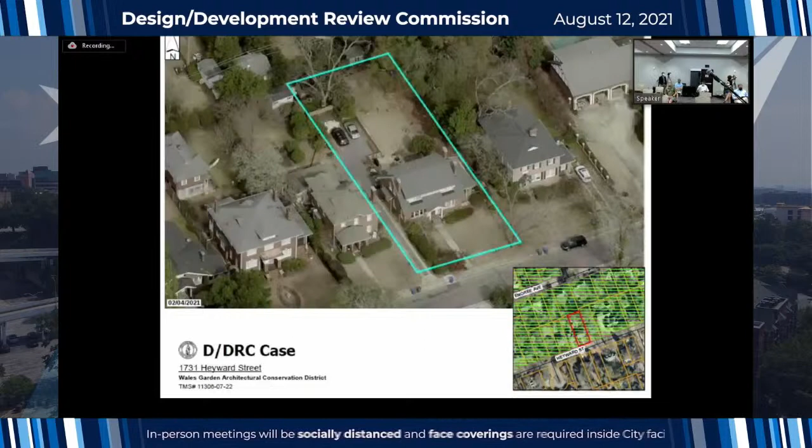Will staff please read the consent agenda? Certainly. The first item on the consent agenda is 1731 Heyward Street, a request for design approval for an addition in the Wales Garden Architectural Conservation District.

The next case is 3101 Amherst Avenue, a request for design approval for exterior changes and an addition, as well as for preliminary certification for the Bailey Bill. This is in the Oakwood Court Architectural Conservation District.

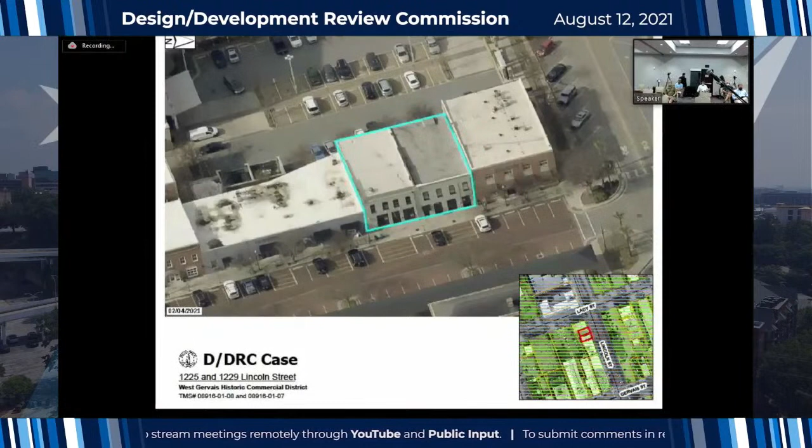The final case on the consent agenda is 1225 to 1229 Lincoln Street. It's a request for design approval for exterior changes and for preliminary certification for the Bailey Bill. This is in the West Gervais Historic Commercial District.

Is there anyone from the DDRC that would like any item removed from the consent agenda? Is there anyone from the public, either here today in person or participating virtually, that would like to have an item removed from the consent agenda?

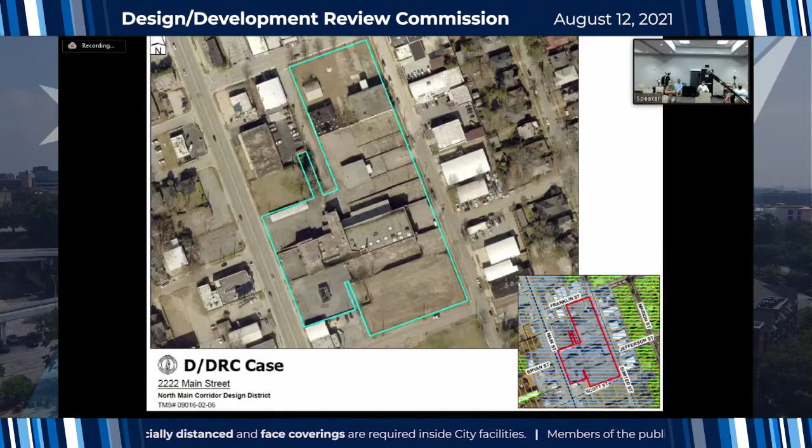Sure, so the first case on the regular agenda is 2222 Main Street. This is a request for certificate of design approval for new construction in the North Main Corridor overlay. This proposal is for a mixed-use development on the site of the former Jim Moore Cadillac dealership between Main and Sumter Streets and between Franklin and Scott Streets. The development proposes 248 residential units and a few live-work units, utilizing primarily structured parking with some surface parking.

The project was before the commission for an informational presentation in May. The commission generally commended the site plan, with a few suggestions about addressing the visibility of the parking garage from North Main Street. Architecturally, the commission recommended a simplified materials palette with a more commercial appearance along the primary corridors, emphasizing the importance of the percentage of fenestration as well as the depth of openings to provide articulation to the facades. Staff comments reference the design guidelines for the North Main Corridor Design District within your packets.

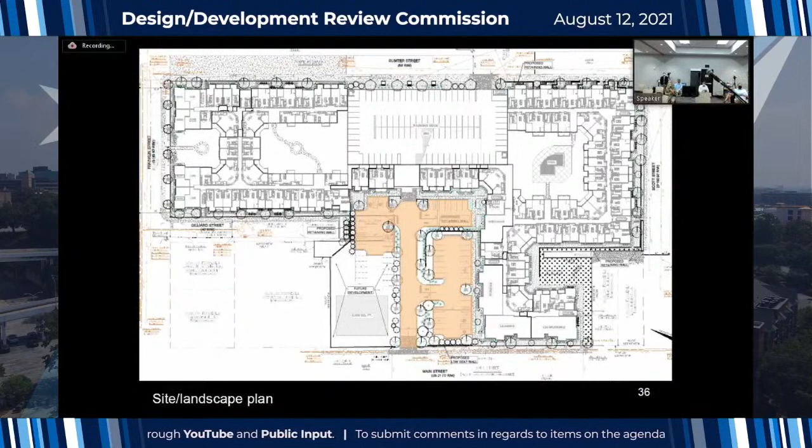The building is primarily sited appropriately, addressing the street frontages with narrow setbacks and placing surface parking to the interior of the parcel and/or screened from the right-of-way. The one exception, which is a change from the informational presentation, is the garage frontage on Sumter Street.

Previously, there were residential units along the Sumter Street side of the parking garage, providing active frontage along the sidewalk. Due to some grade challenges, the units have been moved to the west rear side of the garage, leaving the garage frontage exposed along the sidewalk. While landscaping is proposed to soften and screen the facade, it is far less effective than addressing the public realm with residential units, particularly on this neighborhood-facing frontage.

The building provides straightforward commercial space with large storefront windows that would easily accommodate various uses over time. The applicant has responded to the comments at the May meeting effectively by providing additional brick on the facades, increasing their percentage of openings, and scaling back some of the more stylized details to respond to the simpler context of the North Main corridor.

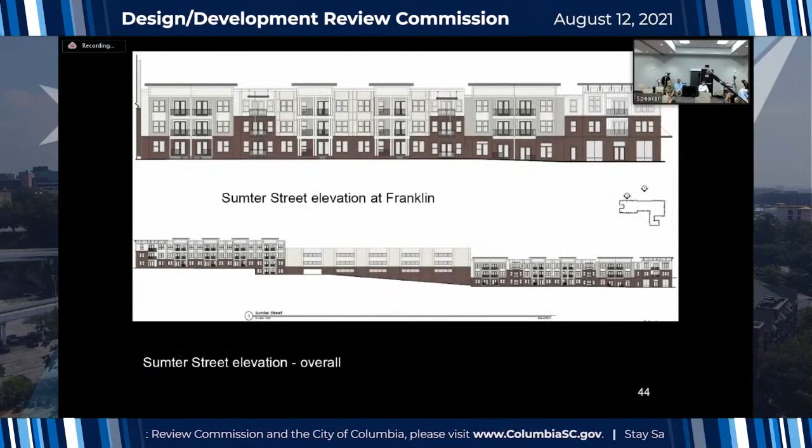While the Sumter and Franklin intersection had previously shown a restaurant space, this has been modified to live workspace for logistical reasons. The live workspace provides storefront opportunities that will provide a nice transition from commercial to residential along this part of Sumter Street. The residential frontages along the street have stoops and direct access to the sidewalk as recommended. The brick is brought up to the second floor to emphasize the corners of the buildings. The Scott Street elevation will need to be reviewed.

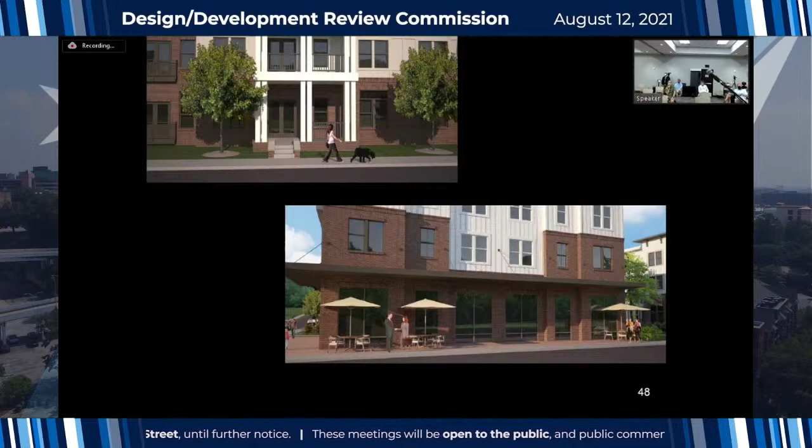The staff recommendation is for deferral of the request, primarily to address the Sumter Street garage frontage. Staff also recommends addressing the following prior to approval: that the brick be expanded on the Main Street facade bays as recommended in the staff markup, a complete elevation for Scott Street be provided, fenestration calculations for street-facing elevations be provided, window details and sections, material details and cut sheets be provided, roof-mounted utility equipment screening be provided if applicable, more information about Main Street entrances be provided, and retaining wall sections be provided to better understand how the grade change will affect the pedestrian realm.

The applicant is present and actually brought some diagrams or an additional rendering. That's the conclusion of the staff presentation. Thank you.

Good afternoon. If you could please state your name. Yes, my name is Stephen Middleton. Do you swear to tell the truth in these proceedings? I do.

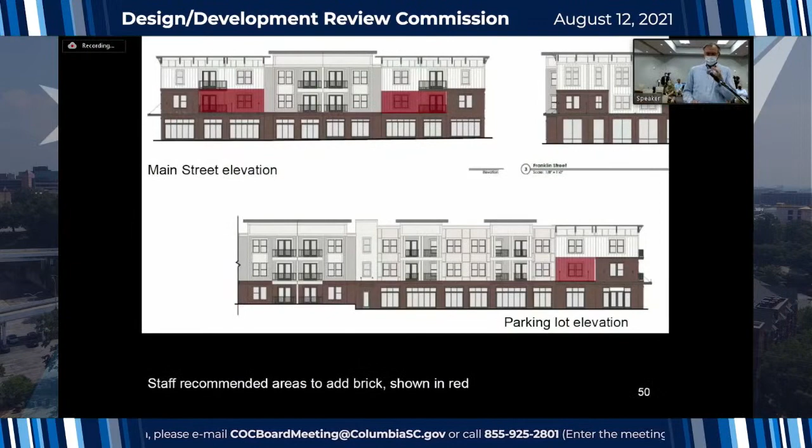I'm Steve Middleton, president of Commonwealth Properties. Commonwealth Properties is the developer of this project. We're no strangers to the Columbia area. We're located in Richmond, but we've developed 4 other projects in Columbia. In the city of Columbia, we developed Vista Commons about 20 years ago, which we still own, down on Gervais Street. It still gets some of the highest rents in that part of town. We recently spent about $3.5 million renovating the interiors, and we're working on the clubhouse. I'd encourage any of you to go by and take a look at it in about a month once the clubhouse is finished, if you're interested.

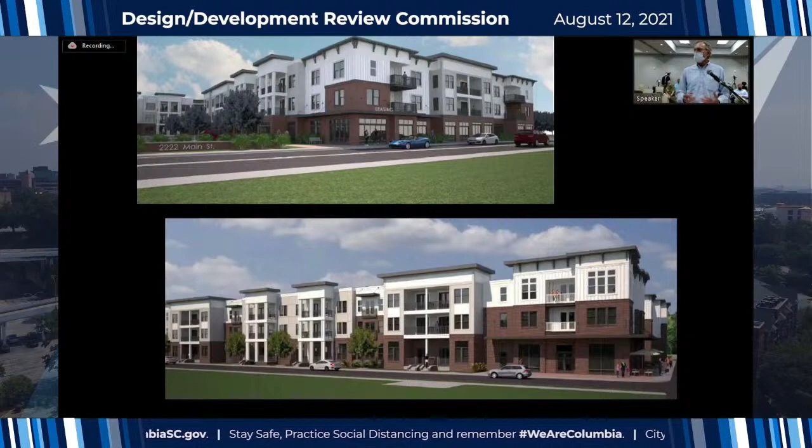We are a development company and also an acquisition company, but we primarily develop luxury multifamily projects throughout the southeast, so that's what we specialize in. This project, as Lucinda said, is 250 luxury apartment units. I'll reiterate, as I said earlier during the informational presentation, that this is not a student housing project. We specifically designed our leasing criteria, both here and at Vista Commons, to exclude undergraduate students. We would embrace any graduate students that want to come, but our typical demographic mix for residents ranges anywhere from recent graduates to graduate students if we're near a university, young professionals, older professionals, divorced folks, empty nesters, retirees. So it's really the whole gamut of folks who are, I guess, now known as renters by choice.

We would expect this project to be one of the nicest, if not the nicest, in the Columbia area, and get rents, I hope, knock on wood, that would reflect that. We started work on the project about a year ago and spent the first several months just trying to understand what the development hurdles might be. And they are numerous on this site, which is something we've embraced.

We spent quite a bit of time working through a variety of site plans and different building designs until we came up with what we would call a preliminary vision concept. We then set out to meet with the folks at Cottontown, Elmwood Park, and the Downtown Coalition. We sent those plans out to them, had Zoom meetings or in-person meetings, either with the neighborhood, whoever was interested in tuning in, or the neighborhood representatives. I think those meetings went generally well. I will note gladly the lack of protest signs behind me. We then took that information and gave an informal presentation to y'all, I think it was a couple months ago, distilled all the feedback we got, and attempted to refine our design to address those questions and comments.

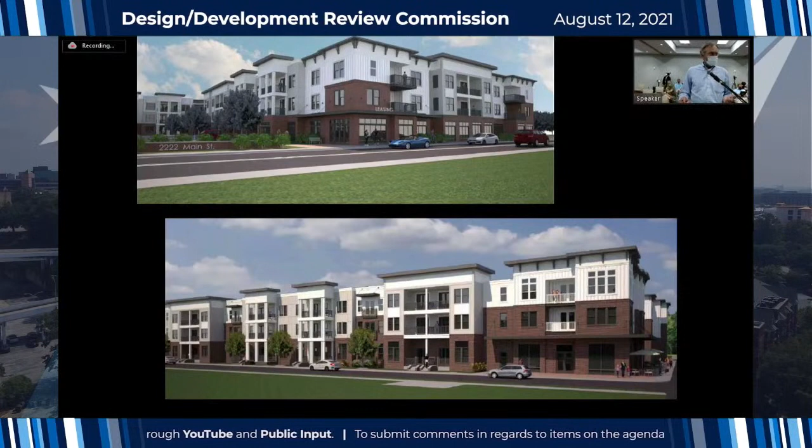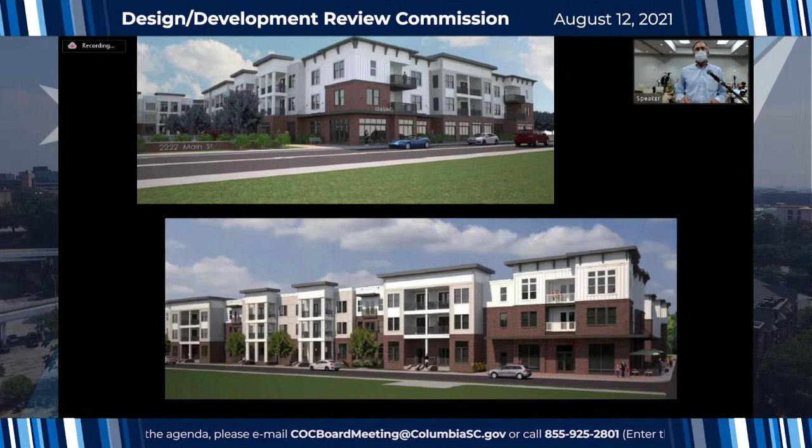At that point in time, I think it came down to 3 main issues: one was traffic, one was parking, and the third was just the architectural style of the buildings. So the architectural style has changed. It's still kind of in keeping with the craftsman style of the surrounding historic neighborhoods, to the extent that this 4-story building can be. We've increased the fenestration, storefront look on the corners there, particularly at Franklin and Sumter, to give it more of a commercial feel. And in fact, those units along Franklin are what we call live-work units.

So they can serve either a commercial function or a residential function or a combination of the two, where someone might have a real estate office up front and live in the back. So they're sort of a residential commercial flex space, if you will.

We also commissioned a traffic and parking study. We got that back probably a month ago, gave it to South Carolina DOT and to the city traffic engineer. From a parking standpoint, it showed that our parking, which meets the current zoning guidelines and exceeds the new zoning ordinance guidelines, exceeds what we need according to the Urban Land Institute and the parking study by about 20%. Based upon our experience, it's more than adequate for what we believe the parking needs to be of our residents. Last thing we want to do is build apartments where people can't park their vehicle, because they will not be long-term residents.

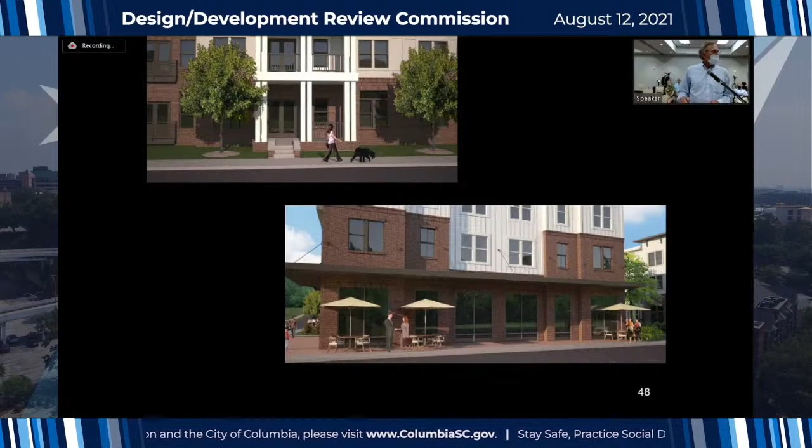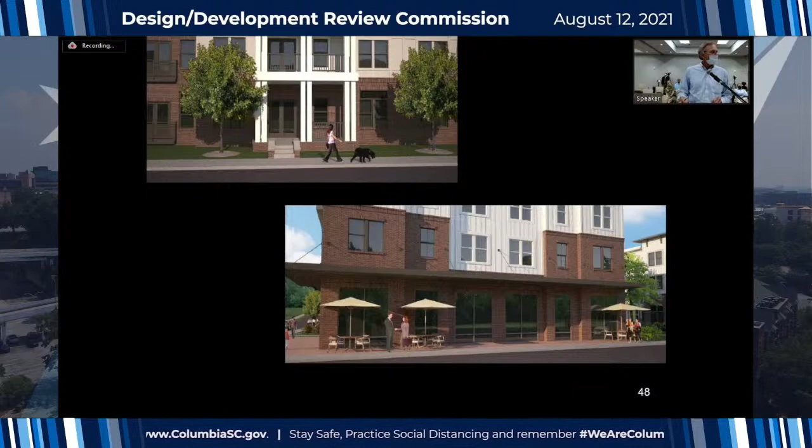From a traffic standpoint, we got comments back from the DOT who objected to our 2 entrances onto Main Street. So we had to change that to 1 entrance, which wiped out a little bit of parking, caused us to redesign some of the parking up front, and also requested that we repave and restripe the 2 northbound lanes of Main Street from Elmwood to River in order to get access to Main Street. So we're still talking to DOT about that requirement, but I suspect they'll win.

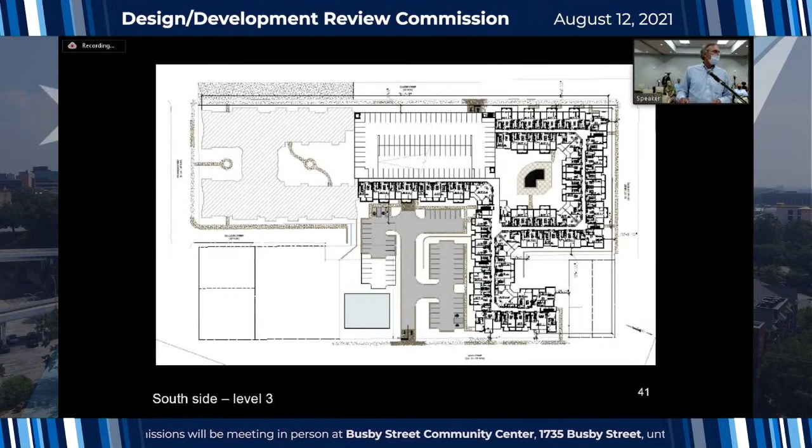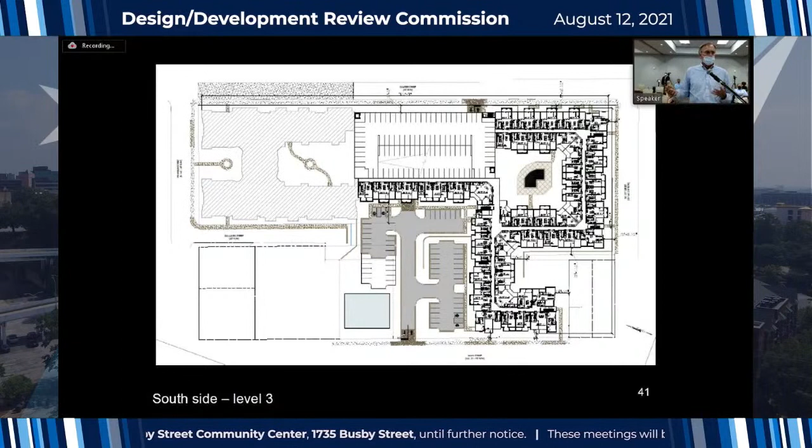So then, I think our current efforts really addressed most of the feedback that we got from the neighborhood and what little we got back from y'all from our informational presentation, which is understandable, and some of the concerns that we got back from the city during our meetings with them. I'd be happy to walk through the staff recommendations and address those.

We had a little bit of a misunderstanding on my part relative to what was necessary to make a complete submission, so we were a little tardy in getting all of this information in. But with respect to brick being expanded on the Main Street facade, we have now, as of today, done that and submitted it to the staff. That's not an issue for us to do. I think we have now provided a complete elevation for Scott Street, and it is similar to the other elevations.

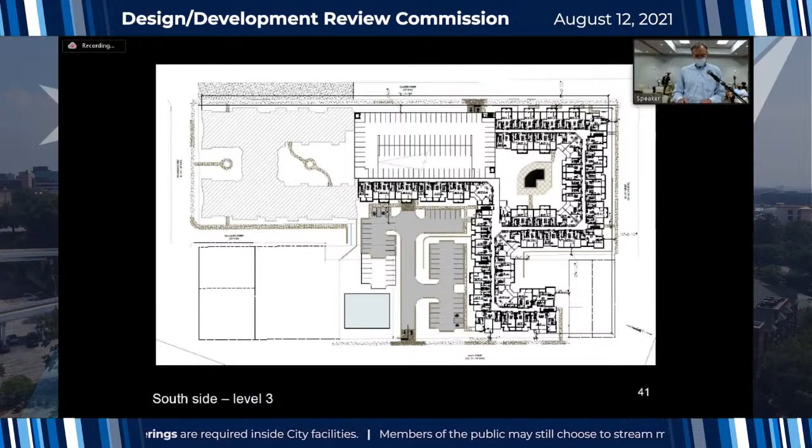Fenestration calculations for the street-facing elevations, I believe, are being done if they have not already been done, as have window details and sections. Roof-mounted utility equipment - all of our HVAC units will be located on the roof. They're located in the middle of the building and will be invisible from street level, hidden either by parapets or just by virtue of their location in the middle of the buildings. We typically locate those over top of the corridor that runs down the middle of the building so that the top floor unit doesn't have HVAC units buzzing away over top of them.

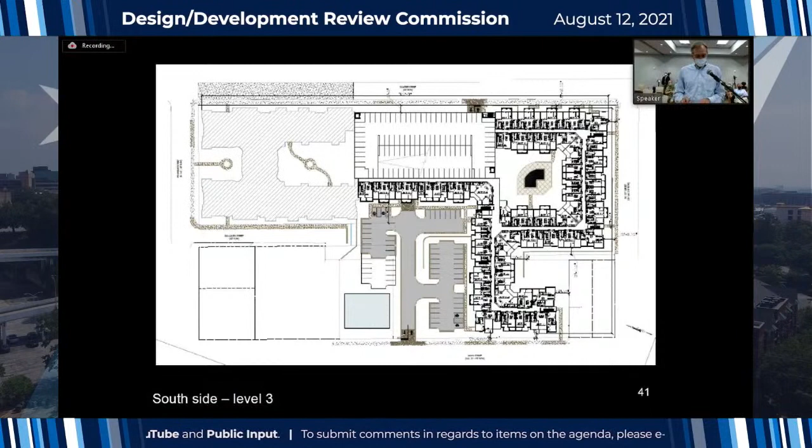More information about Main Street entrances - I think what staff is referring to there is entrances into the leasing office and the co-working space, the bike shop, and the pet spa along Main Street. We would provide a main entrance into the leasing office right at the corner of the building there next to the surface parking, and then we would have 2 or 3 other entrances along Main Street from the sidewalk into those spaces, although they are not commercial spaces generally open to the public. So most of the use of those spaces would be from folks who live there in the project.

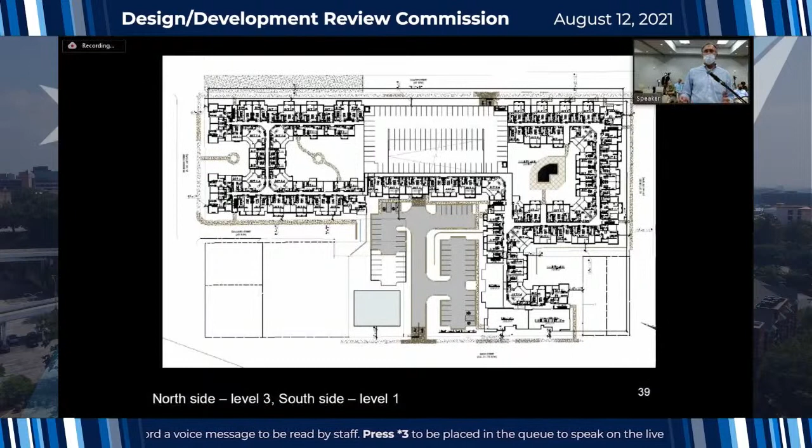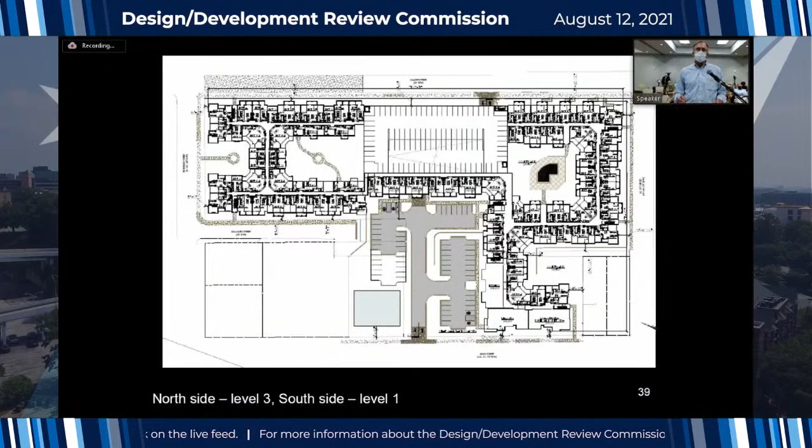I will say too, I'll back up a little bit - I skipped over some of the amenity package in my rush to describe it. So along Main Street there we have a leasing office and a co-working space. We've started including a co-working space into our amenity package where folks from the project, it's like a gather or a WeWork space, can come into this sort of communal area. They can meet with folks from the outside as a conference room, a coffee bar, that sort of thing. There is about a 3,000 square foot fitness center that we spend about $120,000 on fitness equipment on, so it's quite well decked out.

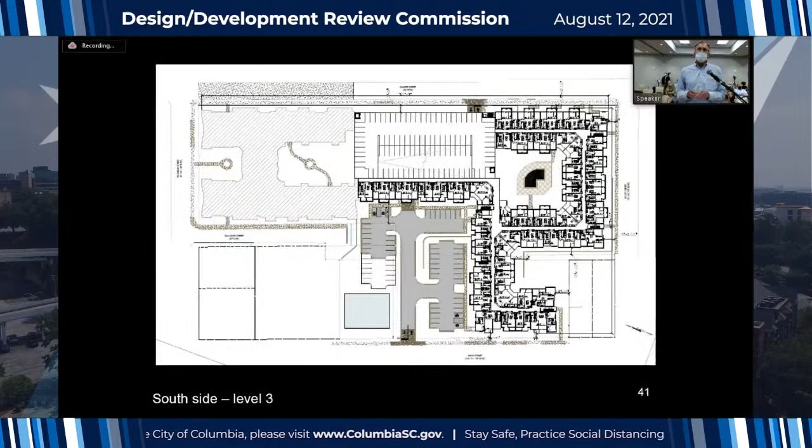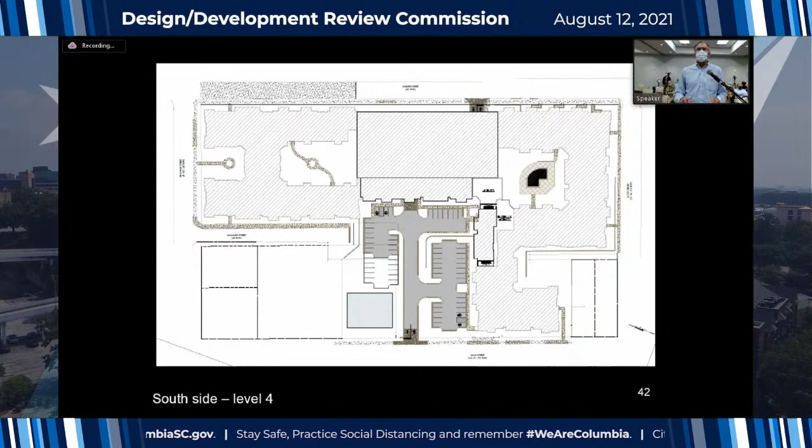We have a pet spa for people who want to groom their pets. We have a bike shop, a bike repair shop area that has bike storage as well as an area to repair bicycles. Then up on the top floor we have a rooftop club room that's about 1,500 square feet with a similarly sized rooftop deck that would look over top the pool courtyard as well as have views of the downtown central business district. The courtyard on the right side of the screen is the pool courtyard.

We call it the active courtyard. It has a swimming pool, which also features a heated swim-in place spa area. We have an outdoor kitchen area there. We have cabanas, an in-water lounge area, lounge chairs, sun deck, hammocks.

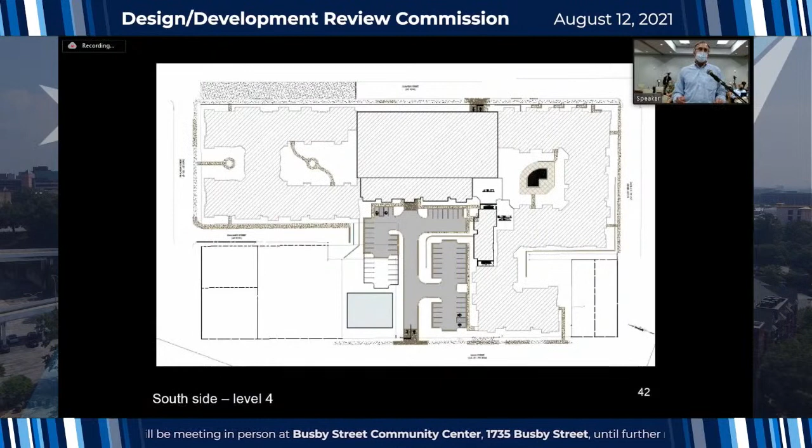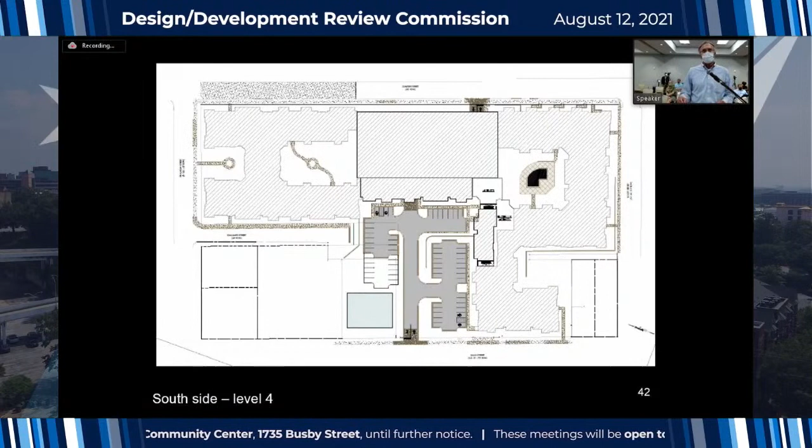And then on the left-hand side is what we call the chill courtyard, which would feature an outdoor yoga exercise area, maybe a putting green, bocce ball, cornhole, some grills, generally a little more relaxed and quieter area there for our residents.

The one area that I think we have difficulty accommodating staff's requests is probably the one that they're most concerned about, is the location of the parking garage there along Sumter. And you can see in this site plan, the big rectangular box in the middle, which is the parking deck, and going towards Main Street, towards the bottom of the screen, are units that line the parking deck.

Those used to be on the top side, lining Sumter. There's about a 16-foot grade change from one end of that parking deck to the other. There's about a 30-foot grade change from the southwest corner at Scott and Main Street to the northeast corner at Sumter and Franklin. So there's quite a bit of topo there to deal with, and we're forced, because of the street grades there, to deal with that 16 feet as it sits on Sumter.

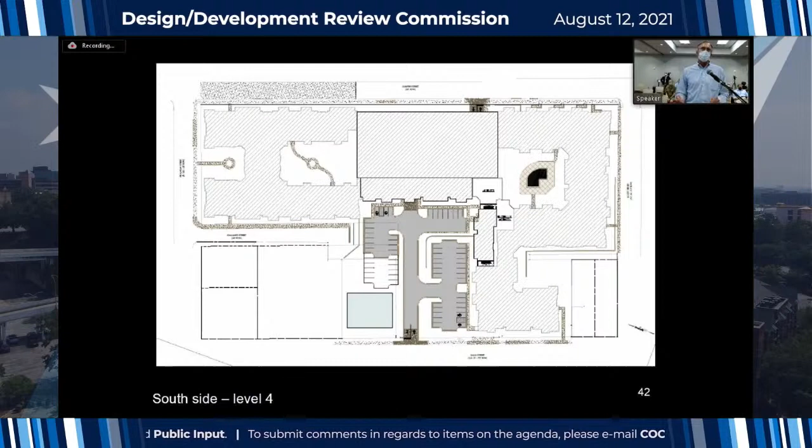We can internally manipulate the grades, but along the street there we're unable to. So to the extent we have units that face Sumter, they also have to meet handicap accessibility requirements, and that grade exceeds what we can do internally in the building to meet the handicap accessibility. So that's the primary reason, not the only, but the primary reason why we flopped those units over to the south side of the garage, the bottom side of the garage, where we can actually deal with the grades there on site.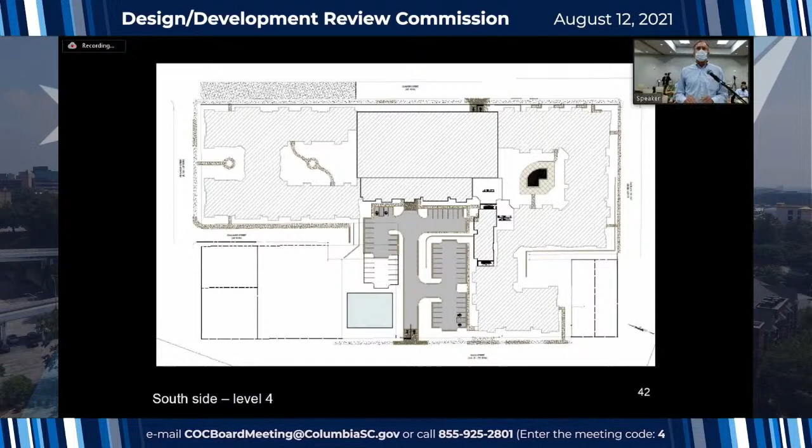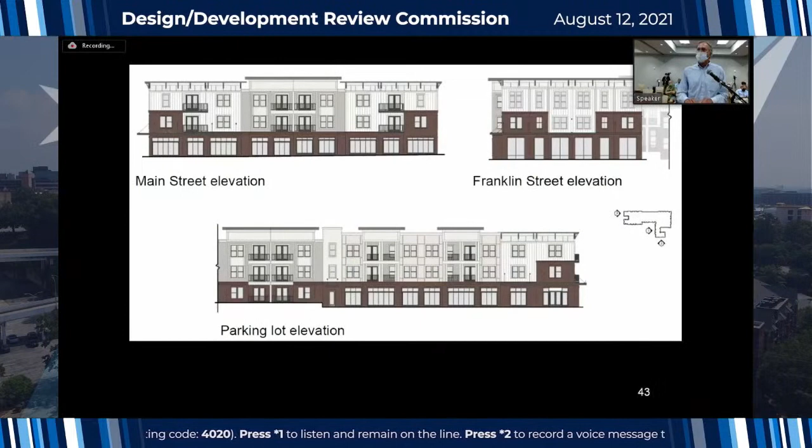The package that you have, that you saw, was embarrassingly just sort of the naked end of the garage. And we fully intended and intend to do more with that, to make it a little more presentable. There it is,

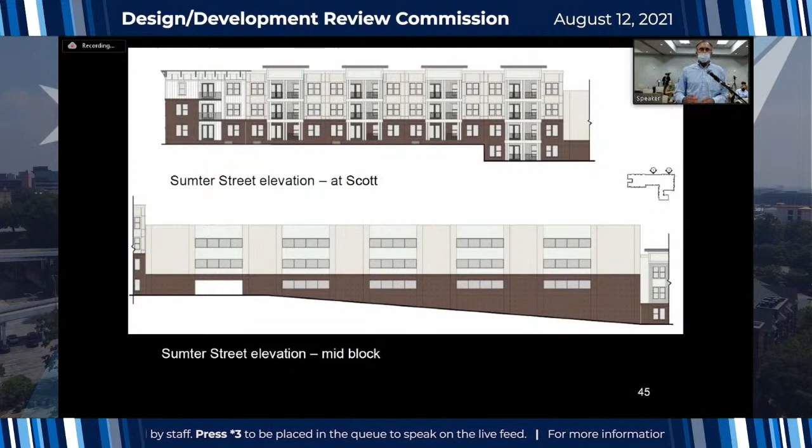and pedestrian friendly. So our idea is to create a linear park along that face of the garage that would have a series of little pocket parks that would capture people walking up and down Sumter there. We would brick the bottom part of it, put some landscaping, benches, sidewalks, paver areas along there to invite folks to use that area as a spot to relax and enjoy the street level interaction on Sumter Street there.

If you have the little handout, the single sheet of paper handout there, I think is a better representation of what we are attempting to do there. We're trying to dress up what is a garage and make it look a little more like a building, but certainly not offensive as a parking garage might be. And invite folks in 2 or 3 areas, or 3 or 4 areas, to use that space to relax, as I said.

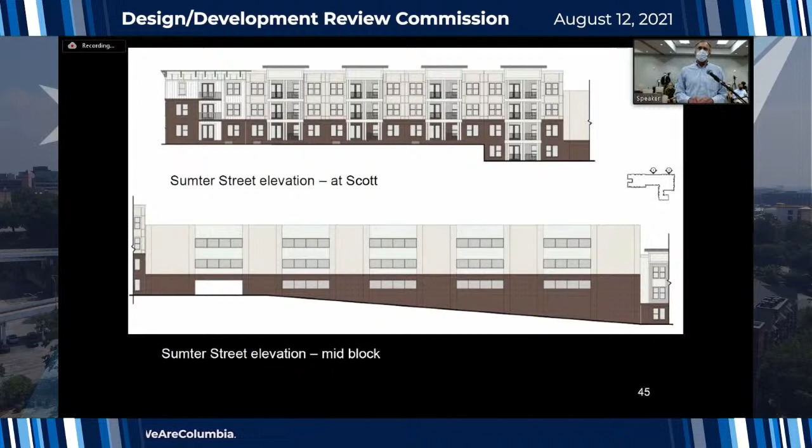As my architect said, if we have to move the garage, it's like throwing a hand grenade into the site plan and the project at this point. And I don't say that as an excuse, but we have been working on it for quite some time, and we have gotten quite a bit of feedback from the neighborhoods and the staff that we've attempted to incorporate. So it's not something I would relish, is restarting or starting over on at this point in time.

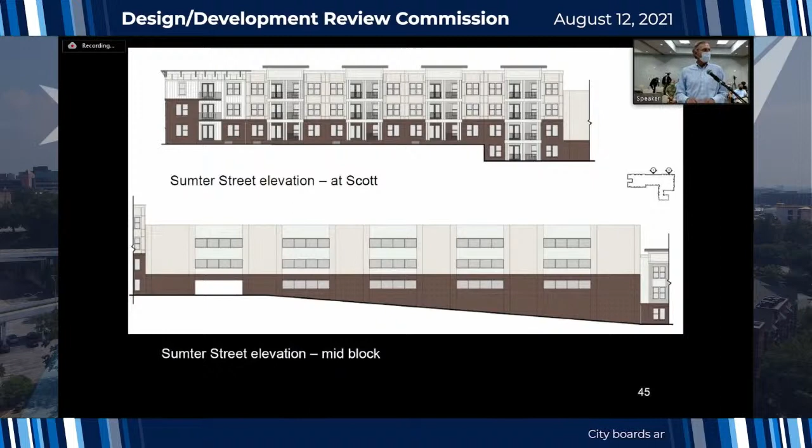I'm out. That's all the talking I got.

Madam Chair, could I make a comment? Yes, I was going to ask too, just if staff had any comment before we start, but for some of the information that was provided since materials were received. I know he kind of was going through this bulleted list of things that had either been provided since then, so can you give us some feedback on that?

I mean, the only thing, I guess, that I would say is that typically, most of the bulleted items on the recommendations would be fine with deferring to staff, but since there was the big issue about the units on Sumter Street, that was the primary reason for the recommendation to defer. So the other things could be handled by staff, but that one issue was something that was considered significant enough to warrant the recommendation to defer.

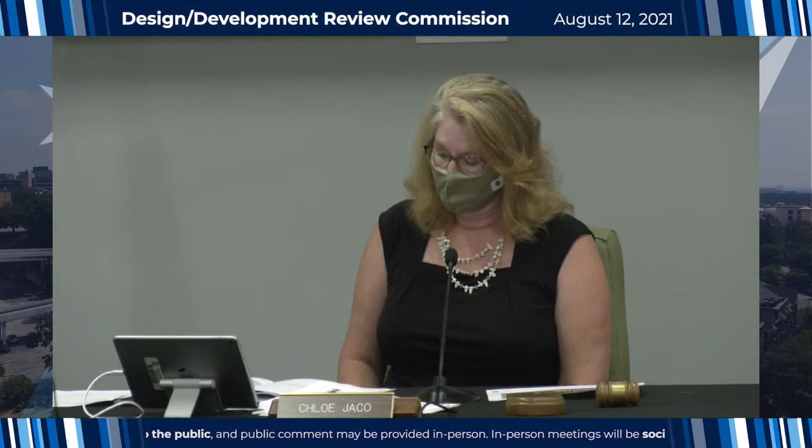I mean, for our part, we're certainly comfortable working with staff to get the first 6 or 7 issues resolved. And what happens along the face of the parking deck, I'd be happy to work with staff as well.

Moving the parking deck is a much bigger deal. I'm not drawing a line in the sand, don't misunderstand me, but that's a much bigger deal. Now I'm going to open it up to DDRC commissioners.

First of all, thank you so much for your hard work in meeting some of the original comments you got. I wasn't part of that, but I can see you've put a lot of work into it. I think the part that's missing a bit for me, and not that I don't trust staff to handle it, is there's not a lot of definition about what the materials are.

I understand the previous submission was a little more detailed and complicated, and that y'all simplified that, which I think is good. But I think we definitely need a bit more detail. I think context is particularly important when submitting this type of information.

So the site plan isn't even shown on the aerial to know what the impact of the garage, for instance, is on the areas across the street. I did some of that research myself, and I've walked up and down Sumter and along those wonderful new things that we have there. I think it's important that it's not just about how this garage looks, but how it impacts that pedestrian experience. Thank you for bringing this new rendering, that helps a lot.

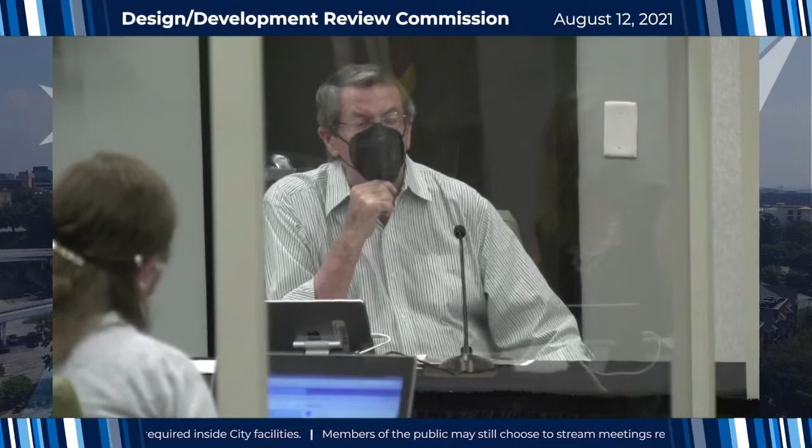I can unload appliances from the parking garage into any floor of the units—refrigerators, washers, dryers. We own the appliances, so if somebody needs a new one, our maintenance guy supplies it. The easy way is to pull into the garage, take the refrigerator, put it on the elevator, go up to whatever floor, directly from the garage into the building, and wheel it down the hall into the unit. Same for groceries—you park, get on the elevator, go up to your unit, and walk directly into the building at that level.

One other thing is trash collection. How's that going to work? We have one main trash collection area and we hire a group called trash valets. You put your trash in a special can they deliver, set it outside your door at 8 o'clock at night. They come by in the middle of the night, pick it up, take it to the trash collection room, and it drops into the compactor on the bottom floor. The compactor packs it, and 2 or 3 times a week the maintenance guy rolls the compactor out to the trash pickup area, where the truck takes it, dumps it, and puts it back. So you don't have to ever use the trash room, but you can if you want. It's located at the southwest corner of the garage.

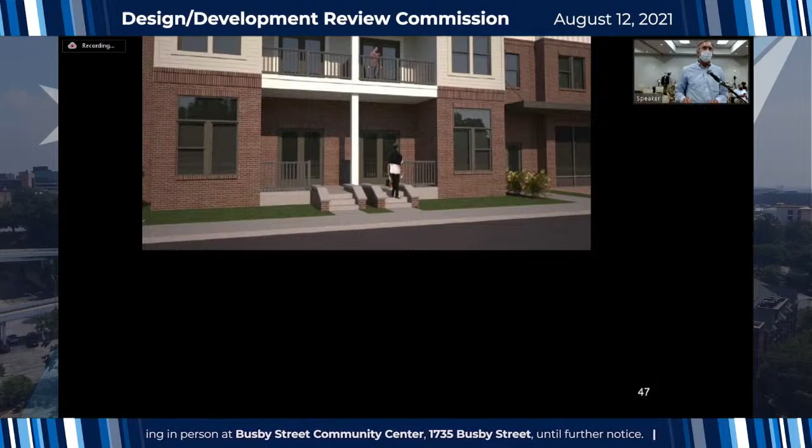One last thing—on your elevation, you show steps coming off the units, separated with a little gap between the two front steps. I'm not in favor of that idea with the gap between them. It looks like it's just going to collect trash, unless you have shrubbery growing in there. I don't see how that's going to work. It's a minor thing, but it needs to be addressed.

We've got a structural column in the middle there, so I think the architect was trying to keep people from slamming into it if it were one big wide stoop, since they're looking at their feet walking up. I'd be afraid if we planted a bush or shrub in there, it wouldn't grow since it's kind of wedged in.

So we could perhaps separate the stairs a little further. That's 2 sets of stairs—one goes to the unit on the right, one to the unit on the left. In the past we've separated those two units with a railing sometimes, so everyone has their own little private front porch. The railing could tie into that—that's another thing, you're missing railings. So we could spread those farther apart, though they might not line up with the doors. I'm not sure they line up right now either, but we can look at that.

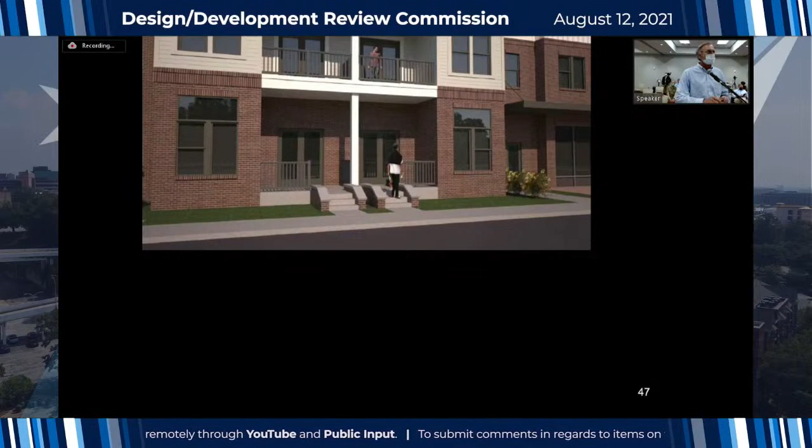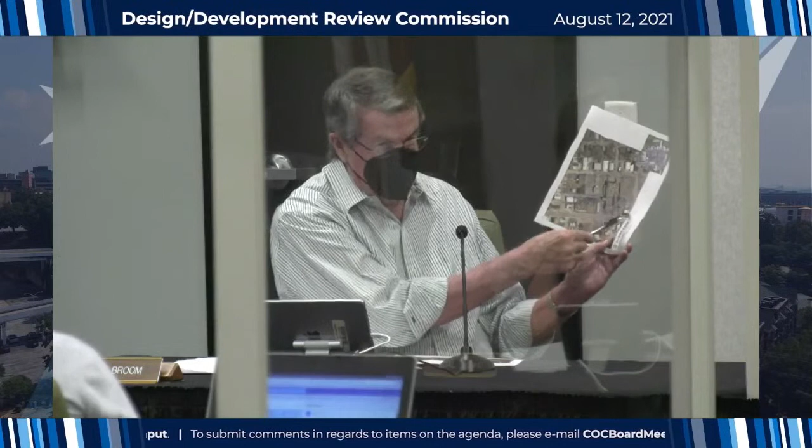One last thing—I noticed on the site plan, this area here is occupied, and the corner here is occupied. Is there going to be a future development, phase 2? I don't know—somebody asked that question and I didn't know the answer. I can't speak for those folks, so it's not part of our plan.

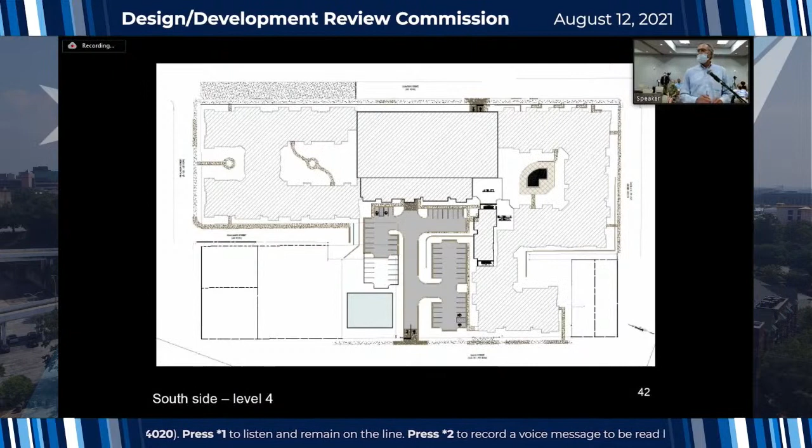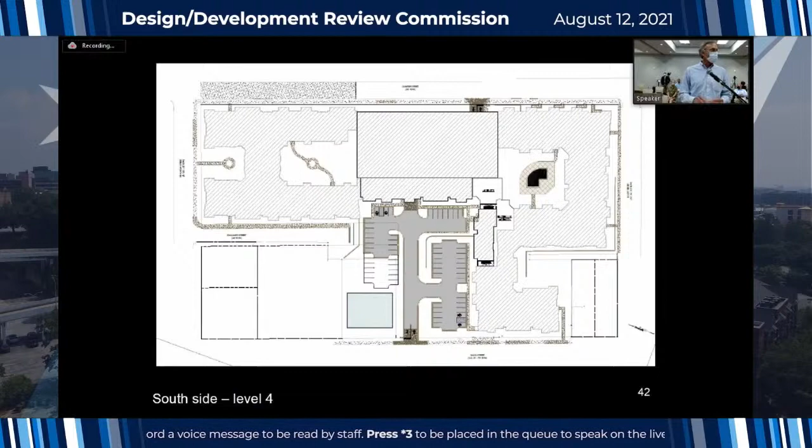There is a grassed lot, 2314, a rectangle there that we attempted to buy but were unsuccessful, which we designated as a future commercial spot—maybe for a little wine and cheese shop, a bodega, or some small commercial area. So far we've been unsuccessful in acquiring it. I've met with two of the other property owners just to discuss what we were doing, and they were delighted that something was going to happen there.

Thank you. Any other commissioners have any comments?

I have a quick question for staff in light of the new rendering we've received. Now that we've had an opportunity to hear you talk about the project, you expressed concerns with ADA compliance if the residential units were facing Sumter Street. I'm curious, in light of that, since staff recommended deferral to address the parking garage facade, short of moving the residential units back to where they were originally, is there another alternative you've discussed? Is there something in the middle that would permit the garage to stay where it is but still fall within the design guidelines?

Are you asking staff? Yes, the alternative. I guess there are probably a number of alternatives. Having screening along a blank parking garage frontage is sort of the last resort for a blank wall along the street edge, but that's better than not having screening at all. Having units is ideal. If there are alternatives in between, that would certainly be for the applicant to propose to the DDRC—if there's a way to get some units, or a unit. That's not something we're going to recommend how they solve, but there are still concerns about that long stretch of no active frontage. Maybe there is another solution between the two that have been presented.

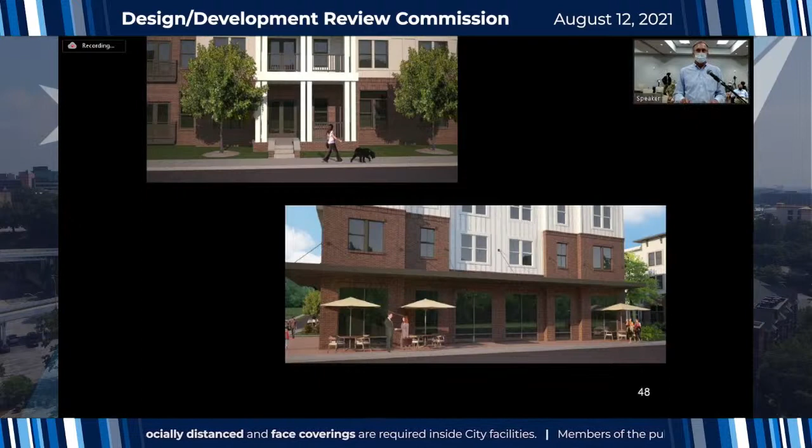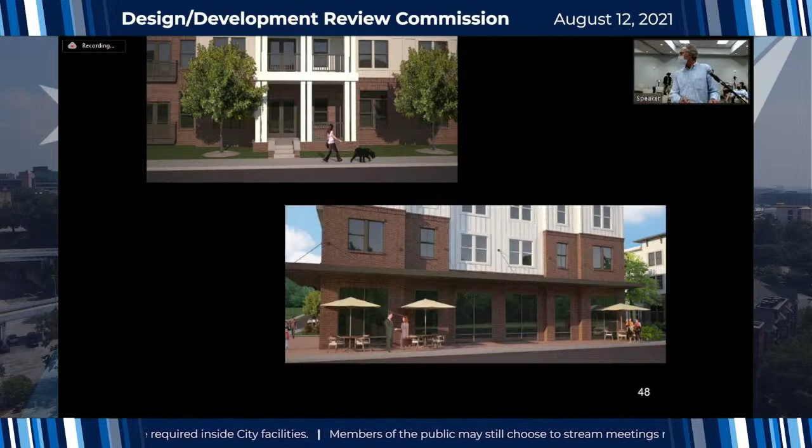I have a comment—can y'all hear me all right? I don't have a button on here. Yes. Just more of a comment, not necessarily a design comment, but from a market knowledge standpoint: for the live-work units, I'd probably like to see more traditional retail. Live-work in the city of Columbia hasn't been extremely successful. There are very few examples, and the few that exist haven't done tremendously well here. I know what you're trying to accomplish—moving the units that were originally designed with the parking garage to now face Sumter, and just trading them off over there—but it's something to consider.

Also, from an aesthetic standpoint on the garage, consider some sort of living wall, like a big vine or something at a manageable height, that may block some of the brick but could give a different appearance than just a parking garage.

Any other commissioners, any other comments? I just want to say I think this is a very exciting project. For me, I think we've got some information lacking to have confidence about how things are going to move forward—that's probably a little bit of my concern. But does anybody else have any other follow-up or questions at this point? Okay.

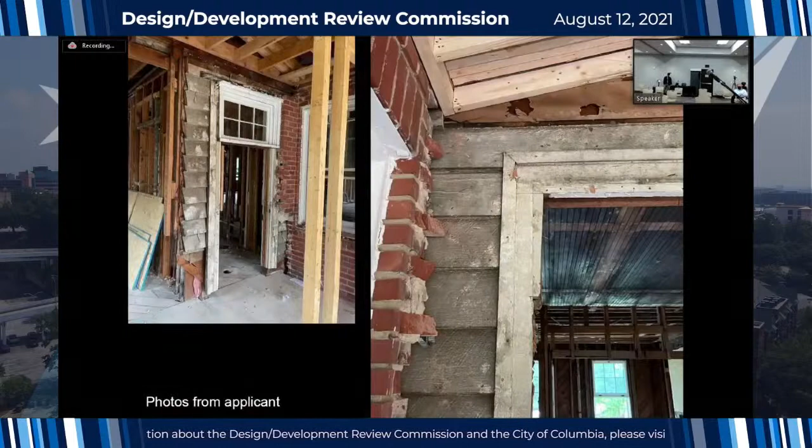J. Carroll Johnson himself became the University of South Carolina's resident architect in 1944, and was also responsible for the design of many buildings on that campus from the 1920s into the 1950s. Johnson was also known for his residential architecture, designing over 120 houses during his career.

Based on research done by Historic Columbia, we can confirm that at least 6 houses were designed within Wales Garden that were either done by J. Carroll Johnson himself or in partnership with Urquhart. This particular house has similarities with other Johnson-designed homes, such as the form, towering chimneys, use of 6/1 windows, the door surround details, and classically detailed covered entry.

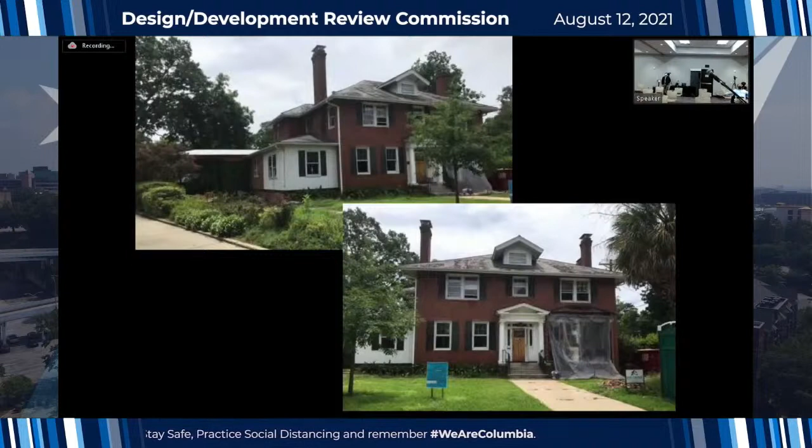Intact historic features include windows, chimneys, front door surround, covered entry, and the front dormer. The overall historic form is also discernible. The brick veneer was added likely in the 1940s, and interestingly, the wood siding that was the original cladding on the house is still intact beneath that veneer.

Looking at precedent for allowing wholesale window replacement, staff researched files for requests for wholesale window replacement in Wales Garden and found no cases where it was allowed for a contributing structure. There are 2 instances staff found where wholesale replacement of historic windows was requested. One was at 144 Saluda, which was denied by the DDRC. Another was at 203 Saluda, where wholesale replacement was denied, but specific windows were allowed for replacement where they were found to be non-original or minimally visible.

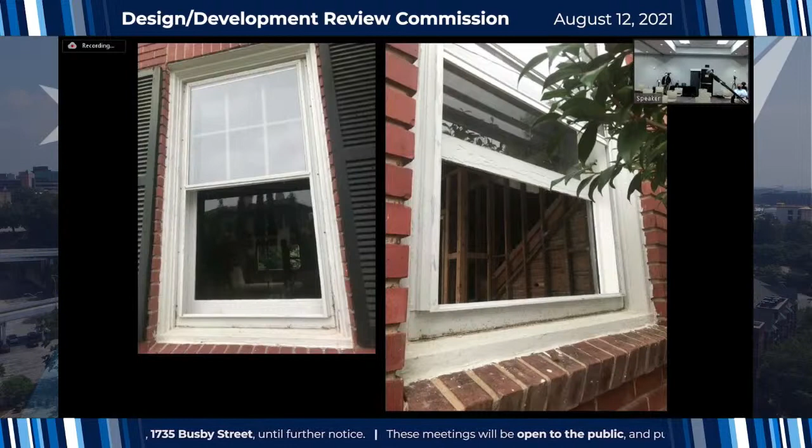Also want to note that highly deteriorated or non-repairable windows, and non-original or non-historic windows, are always permitted for replacement. Many of these instances are handled at staff level rather than requiring DDRC review as part of our process.

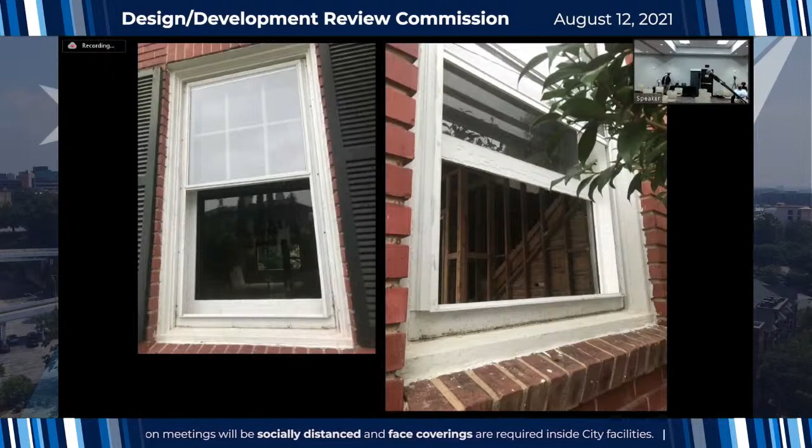Looking at the guidelines for doors, they state retain and repair historic door openings, doors, screen doors, trim and details such as transoms, side lights, pediments and hoods, where they contribute to the architectural character of the building. The current door itself appears to be a replacement. However, the surround, including the transom and side lights, are original and contribute to the architectural character of the house. The side lights and transom include diamond-patterned leaded glass tracery, which can be found in other Johnson-designed homes, as well as other colonial revival-style homes within this district.

While some glass and lead cane does need repair, staff has found that the surround is in repairable condition, and per the guidelines should be retained and repaired.

Looking at windows, the guidelines state when technically and economically feasible, repair of deteriorated or damaged windows shall be preferred over replacement, as well as, if wholesale replacement is found to be necessary, either match the original unit or substitute a unit appropriate to the period of significance for the home.

Staff has found, based on their evaluation, that all windows are in repairable condition, and thus replacement is not found to be necessary. While the windows likely need repairs to make them operable, the windows staff evaluated were intact, without rot, and with weights still in place. Staff didn't note any deterioration that would require replacement, but is always happy to reevaluate if deterioration is found over the course of renovations.

As stated in the principles for windows, windows are a significant character-defining feature of any structure. Original windows were constructed so that individual components could be repaired instead of requiring wholesale replacement if one piece rots or breaks. Included in your packets, staff provided photos of repaired historic windows that were in fairly poor condition, much worse than seen in this home. That shows that repair of historic windows is possible and can be done to a high level.

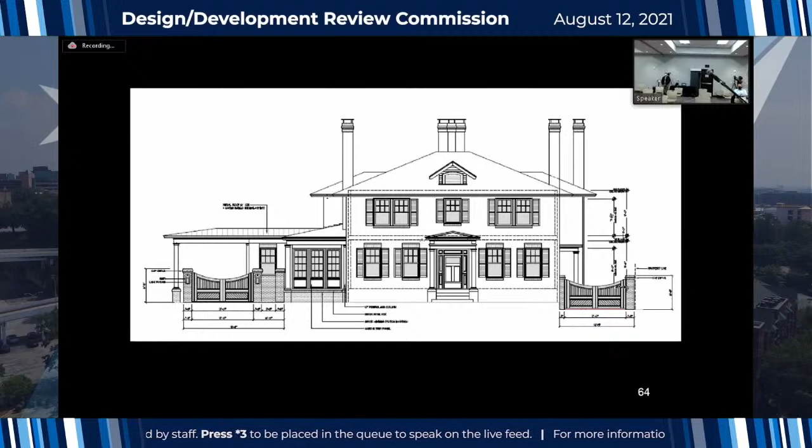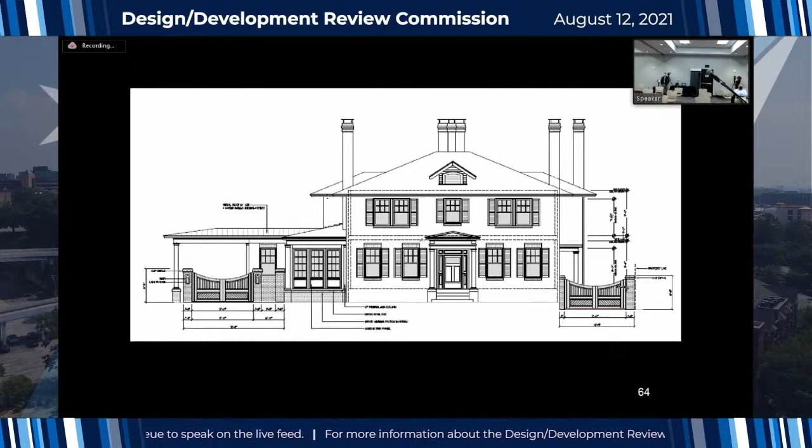Looking at the Bailey Bill standards, Standard 4 states distinctive features, finishes, and construction techniques or examples of craftsmanship that characterize a property should be preserved. The windows and door surround are distinctive historic features that are in keeping with the character and architectural style of the house, and consistent with features found in other Johnson-designed homes. Removal of these features is not in keeping with this standard.

Standard 5 also states that deteriorated historic features shall be repaired rather than replaced, and where severity of deterioration requires replacement, the new should match the old. As previously noted, staff has not seen any deterioration in the windows or the door surround that would necessitate replacement.

Replacing them rather than repairing is not in keeping with this standard. The front door itself, as stated previously, is a replacement, and the door chosen to replace it should correspond in design with the side lights and surround to be architecturally appropriate.

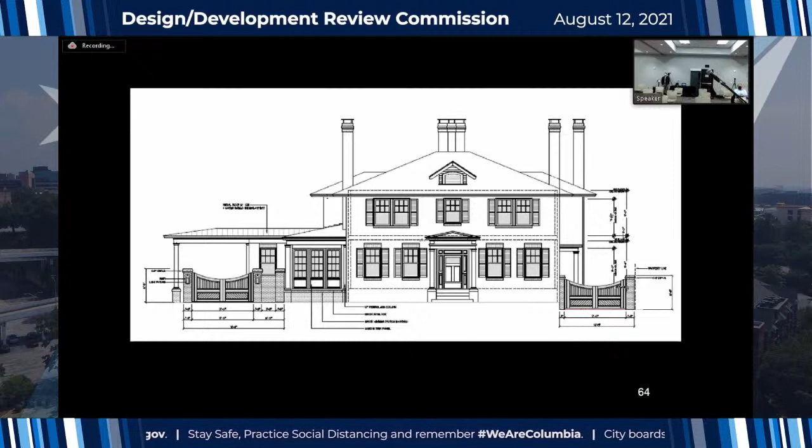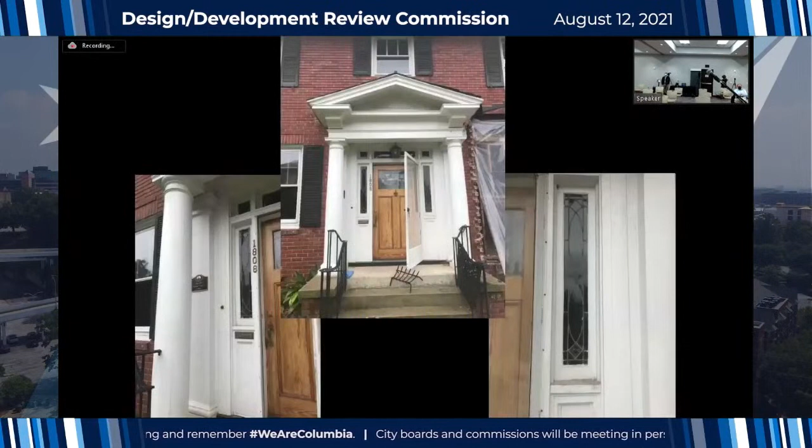Preservation is about much more than aesthetics or how things look. It's about protecting historic character, including features and materials. These features and materials were made to be repaired, and as such last decades longer than modern materials. The windows on this house have lasted 100 years and could easily last another 100 with a little care and minor repairs.

So for staff recommendation, staff finds that the request for wholesale window replacement and replacement of the front door surround is not in keeping with Section 17698 of the City Ordinance or Section 7 of the Wales Garden Architectural Conservation District Design Guidelines,

and recommends denial of the request for a certificate of design approval. Related to the Bailey bill, staff finds that the project as proposed at 1808 Catawba does not comply with section 17698 of the city ordinance.

Staff can only recommend granting preliminary certification for the Bailey bill if the request to replace the windows and door surround is withdrawn or denied, as listed in the following conditions: the request to replace the windows or door surround be withdrawn or denied; the replacement front door be reviewed and approved by staff prior to purchase; the project meeting or exceeding 20% investment threshold requirements; all work meeting the standards for work as outlined in 17698, and all other details deferred to staff.

Any questions for staff? I have one question. Is the office area off to the left of the front of the house part of the original structure as well? It is not. Okay, so those windows would not be under the same restrictions? They are not, and those were already approved for replacement. Okay, great. Good clarification.

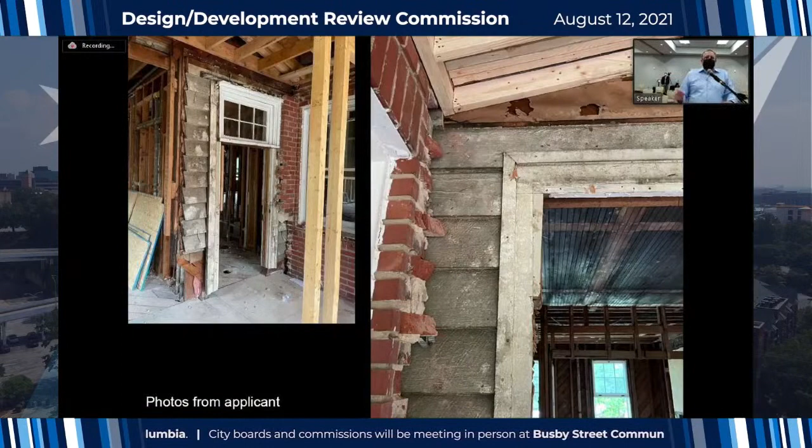So we did, and that was our first approval back in last August, when we got approval for the office on the left and the windows. We wanted to tear off the old-looking bay that somebody had added, probably in the 50s or 60s, that didn't go with the house. I wanted to take the house back to what it originally was. So we talked through that and got through all the approval process.

Everybody said, okay, let's go. So the contractor filed his permit. It took him a while to get everything in order, but he got the permit issued and started the renovation. And then it was like, I forgot.

We've got to get a Bailey bill certification. So we stopped and said, Rachel, why didn't we do that before? I don't know why we didn't do that before, but let's get that going. So we started and got the certification going.

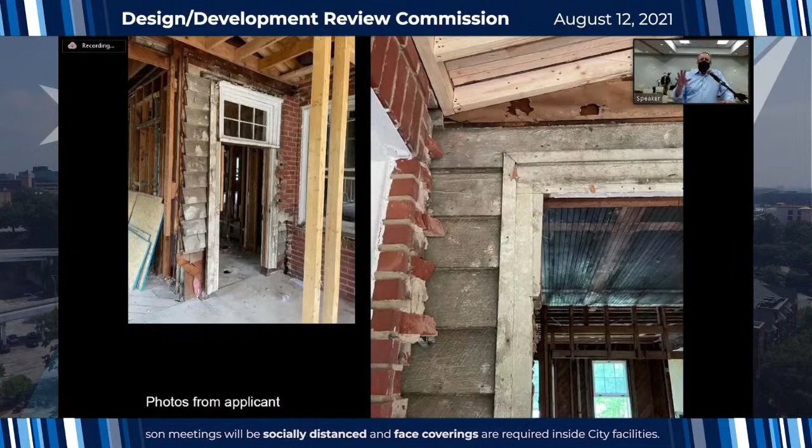In the meantime, Ellen asked me, she said, Tim, if we got the approval to paint the brick, would we have an option to start the discussion with them about the windows? Because I would like to have all of the windows on my house be the same, so when people look at them it's not old windows and new ones.

I said, we certainly could have the conversation, let me propose it to them. We've got to go in for the recertification, the first preliminary part of the Bailey bill, and we'll make that a part of it. And she said, well, while we're asking for that, can we ask for the front door too? And I said, okay, we'll ask for the front door too. Let me think about that a minute.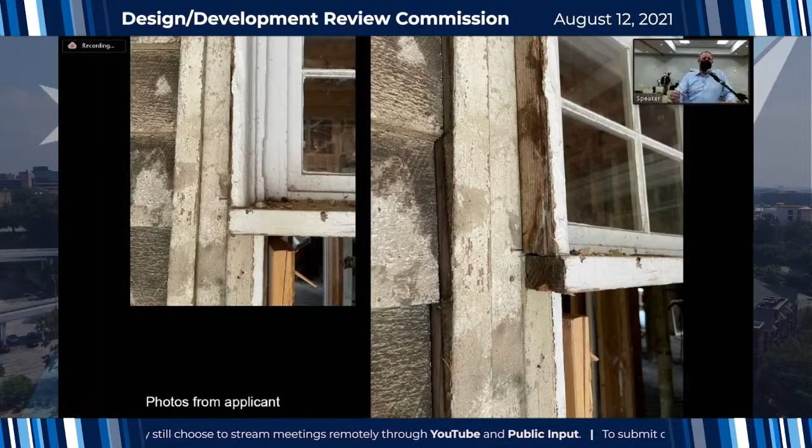So that's the communication that Rachel and I have had. And what's interesting about this house to me is, and I added these photos to what Rachel's got up there now, the house was originally a wood-sided house.

At some point somebody came to Mr. and Mrs. So-and-so and said, it's the world's greatest thing, cover over your siding, and I guess you won't have any more maintenance or anything like that. The house originally, and the two photos are what we peeled back on the back of the house.

This is where we've been doing our addition work and things like that. See, there's about a 6.5 to 7 inch band that went around the original windows. And they did something which I thought was a little clever.

When you veneer a house in new construction, we offset 1.5 inches from the framing. We have an airspace gap in there, and then we put the brick on, which is about 3.5 inches. To fill that gap, we do what we call a brick mold. It's an extra piece of wood that we put around the frame of the window.

That's what they did, they came into this. If you look at the little transom window at the top there, you'll see a little rolled edge. That rolled edge is the brick mold that they added to the units to conceal the gap where they added the brick veneer on the house.

So that brought the question in my mind of, well, has the window been modified enough? They're not original. The sash is original, but the brick mold is not original, and it's varied and changed from what the original intent was.

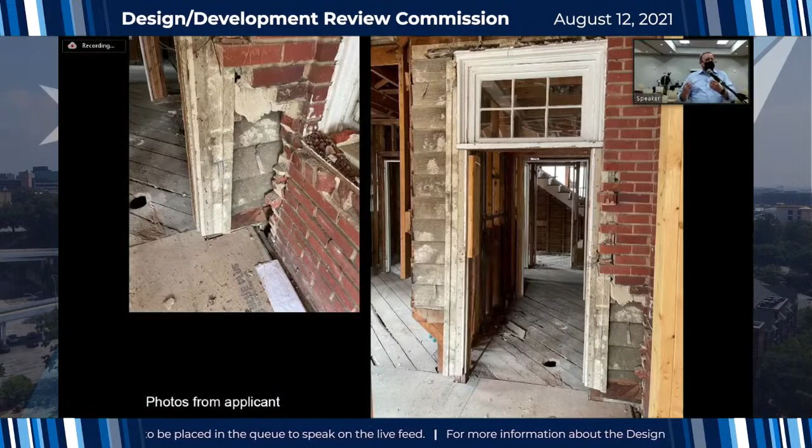Now, as architects, we look at this house and call it a 3-bay house. The reason we call it a 3-bay house is because you have the 3 windows. So the facade instead of being divided by 5 or 7 is 3. That's still intact with the windows and the doors and things like that.

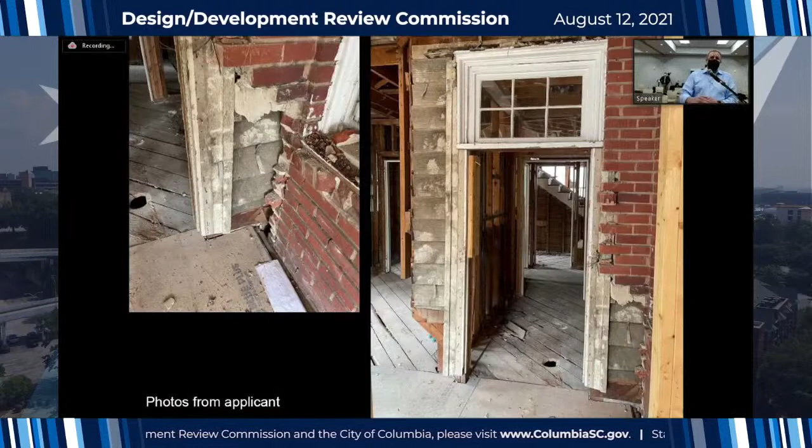So the question for us was, would we have an opportunity to have a conversation about whether it's feasible or not to discuss replacing the windows with new units that are insulated and things like that, while we're doing what we're doing to the house.

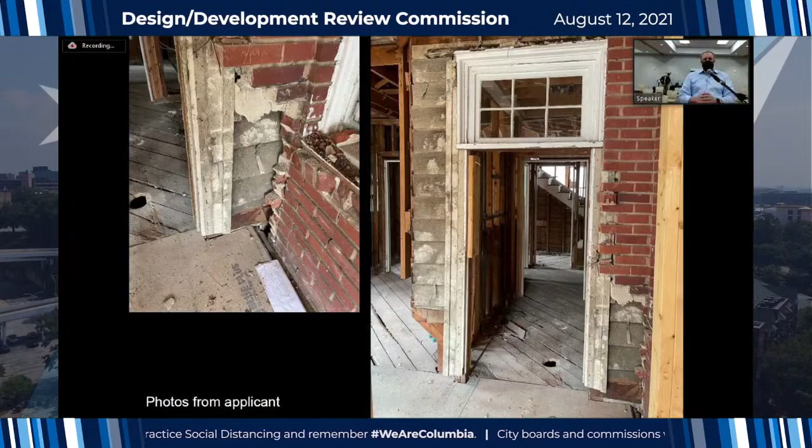I want to back up just a second to tell you, since I've been doing this for so long, everybody probably at some point has renovated something, whether it's just painting a room or tearing down something or adding on to something. So my opinion of renovation has changed a little bit. And luckily I found a client that said, I love this.

So on this house, because they have small children, we decided to take the inside all the way down to the frame. I don't know of a house that I've worked on in 25 years where we've taken the entire inside down to the entire frame.

The reason for that is the owners wanted to remove all of the knob and tube wiring, all of the lead-based paint, all of the plumbing, all of the electrical system that has been patched on.

And a lot of people don't realize when we renovate houses, it may not be a total renovation, it may be attached to what's there. So if knob and tube wiring is still valid, the electrician will come in and update the wiring for the addition, but connect back to it.

Almost every one of these houses has an old Federal Pacific panel, almost 100% of the time. Federal Pacific went out of business because their breakers quit working.

They become spongy, what's the word, and so they went into bankruptcy. Usually you find a house with a Federal Pacific panel, 100 amp, in a closet. You can't do them in closets anymore.

And then maybe there's some sort of sub-panel off of that they've upgraded it to a 200 amp service. This house had that. Plumbing on a house starts out anywhere from galvanized, which is what you see when you have reduced water pressure - it fills in with corrosion on the inside. Copper, which pits after about 30 years. CPVC was a product we used.

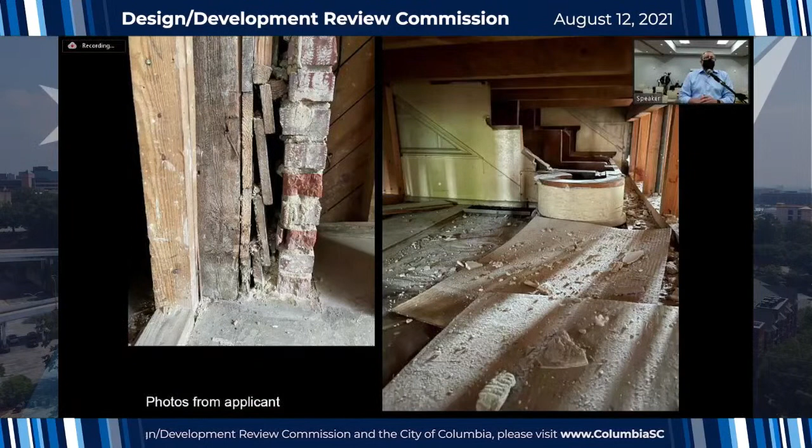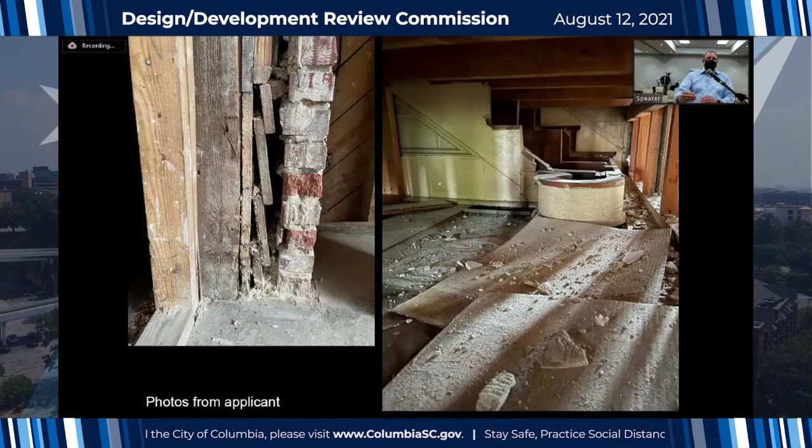So that was kind of the path we took to asking: do we have to, or because of the addition of the veneering, and because of the addition of the brick molding, which is not original to the house, is there enough there that we still have to go by that requirement of reusing the windows that are existing?

Amy and I have had this conversation 1,000 times, probably, through the years. We always have this conversation. Usually when somebody calls and says I want to replace windows, I always say the same thing - we can't. Why? Because of Amy. Who's Amy? Amy Moore. Would you like Amy Moore's number? That's usually the way the conversation goes.

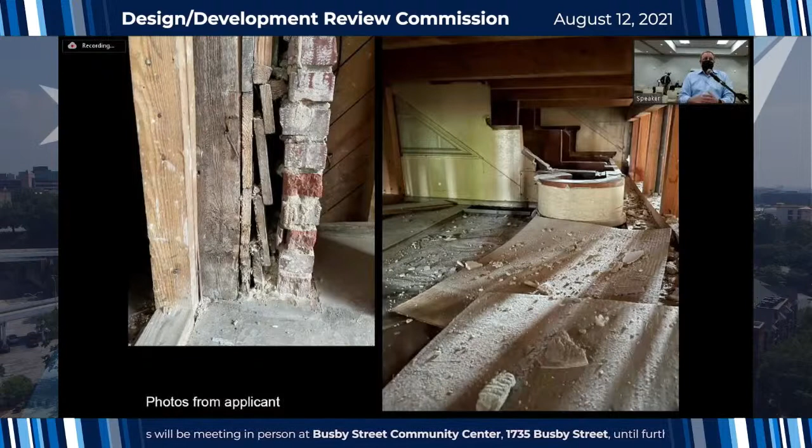And they knew this when they bought the house and everything too, so there's not anything that's hidden here or anything like that. But she wanted me to bring the question to y'all and have a back and forth discussion based on what we've discovered as we've been peeling this back.

Probably the one thing that I disagree with a lot on old houses, with Rachel and Amy, is you can go in and renovate any window. You can go and strip it down, you can do all the paint peeling. But I don't have a lot of guys that do that anymore, so it's pretty expensive. It's a real specialized market - there's just not 25 people that want to go out there and rehab a window.

The last one I did was on Water Reed, around the corner from this house, and we figured it cost as much to rehab that window as it would to buy a nice Marvin or Pella or Andersen unit. And we actually ended up, because somebody had used old units in one area from the 90s that were falling apart - the original ones - Amy and Rachel let me rebuild the ones up top and add the new ones down below.

You have to be real careful with that, because after you spend this amount of money, you want it all to look right. So that is the option, but it is expensive to rehab these units. The one thing that goes with that is, after you spend all this money to rehab the unit and it's looking great, you have two options at that point.

If you want any sort of thermal value, you can add an interior storm window, but not many people do. I've yet to have somebody do an interior storm window. Or the guy goes and buys a $50 metal storm window and slaps it up on the new window that's just been renovated, so you can't see it.

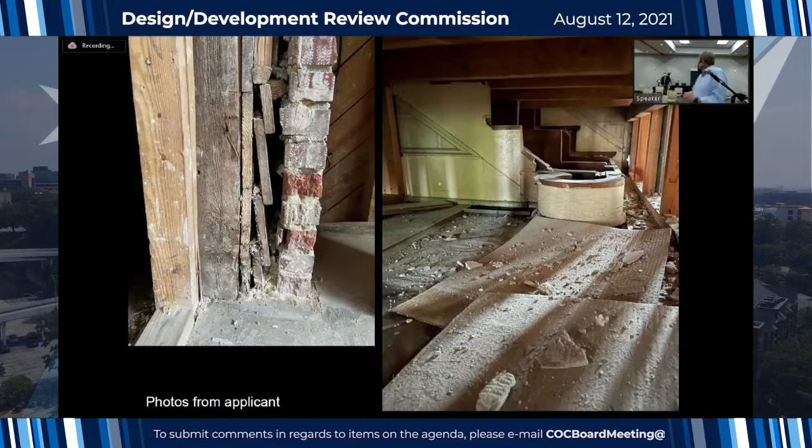All right, well unfortunately I think your time is up at the moment. Oh yeah, it is, the beeper has gone off.

I will open it up to any questions from commissioners. Well first of all, Tim, thank you so much for the lesson in architectural construction, because I really appreciated that.

I really appreciate the attempt to uncover the history of this building and how it came to be. What I don't see is a correlation between how it evolved and how it has in any way taken the window in a different direction other than its original historic condition.

It may have added to it, but it didn't really change the window. So I feel like, it sounds to me, and I guess it's a question to staff, that even if we were to approve it, the Bailey bill would not allow it, and so there would be no Bailey bill credits available to this client. So the argument about the money being spent may be a deterrent.

I don't know, I'm certainly not going to, but you did bring up the value of the cost of the windows and that sort of thing. So I don't know that there was a question in there, but I just wanted to express that.

Before we go further, Madam Chair, I'm not sure that I heard that Tim was sworn in. No, I wasn't. I missed it. I just wanted to double check that. I did, thank you. Do you mean we have to start over? That isn't happening.

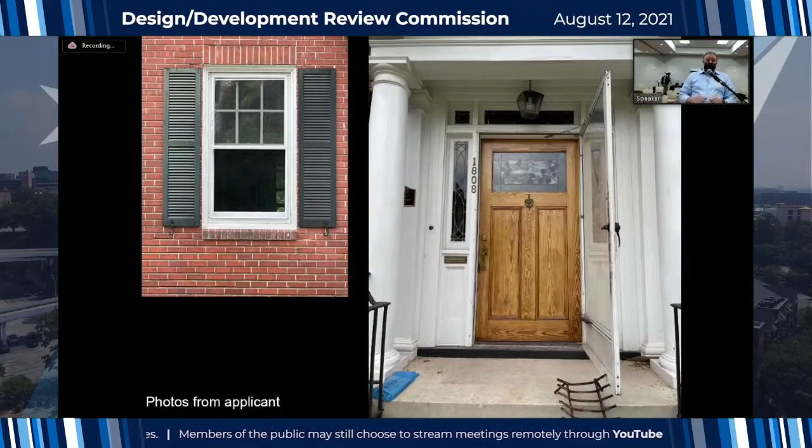So you want to ask your question first? No, absolutely, go ahead. I'm going to come back to the one that's second. But on the front door, I agree with Rachel about the sizing of the side lights and the transom and the tube and the square. Each one that she mentioned in the report, I went by and looked at them and took photographs of them. So you see the little squares on the top corner, the transom is a piece at the top, and then the side lights on the side.

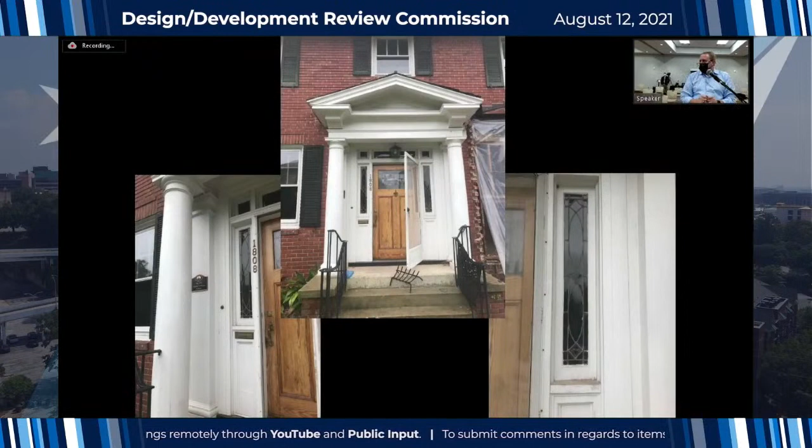What I questioned is I couldn't find one that had leaded glass. Every one that they have done that was noted in the report has wooden mullions and wooden patterns. So I thought, well, which came first? Did somebody like this door with leaded glass and say, ooh, I got to go take out? But you can pop out the side lights and the transom. And was it wood there at one point? Which one came first, the door that we know is not original, or the shape?

So I'm not questioning the actual shape of the surround, I'm questioning the leaded part. That makes me wonder, well, if it was done after the fact, just the leading, because the other four or five listed around town that he did have very similar porticos, almost the same type of divisions, but they're not leaded. They're all wooden mullions. Well, maybe this one was just very special, and they went with the leaded. Maybe they had more money, unless you have proof that it wasn't.

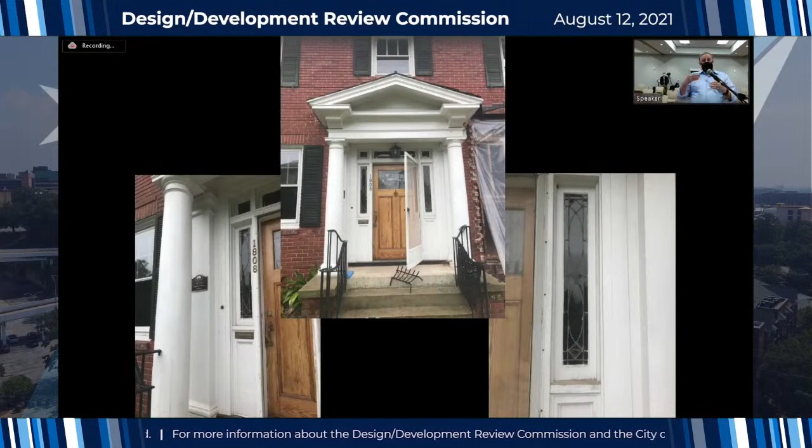Yeah, and that's what I don't know. I don't know if that's original to it or not, but Rachel, I do agree that the door itself is not original. So that's what kind of brought that up for the door. And hence, her question to me was, well, can I take the unit out and do a door that is in keeping with the style of the home but have more glass in it, so that you don't have the little tiny four-inch side lights on the sides, and you end up with a glass door that lets more light into the house.

And I would just note that the lead came on the side lights and transom is different than what you see on the door itself. It seems like the lead on the door itself is not a true leaded glass window. It's like a cheaper version, I would say. Yes, that's the best way to put it. Whereas the lead came on the side lights and transom is clearly older.

So the door was likely replaced to match the leaded glass that's original. I believe so, and that could have been that direction. I just can't find one around town where he's used the lead. He's very consistent about the pattern, very consistent about the shaping, but they're all wooden. Every one of them is wooden. So that was my question, and that's the only thing we were kind of stuck on.

Commissioner Johnson, did that help clarify your question? I think so. So basically we're looking at three different part requests. Sounds like it, that way. So I just wanted to make sure, I know there are some opinions on whether the transom and side lights are original or not, or leaded. But I wanted to make sure we were talking about three different things, because we didn't discuss the door during the presentation, so I wanted to make that clear.

Sure, and I have one other thing. Amy, what if we don't take the Bailey bill? What if we don't go for the Bailey bill? We qualify for the Bailey bill because we're in an overlay district. So what if we choose not to choose the Bailey bill as a part of this? How does that affect us?

Staff, I didn't know how to answer that question. Well, I'm sure we have an answer, so how about staff respond? Right, so based on staff's evaluation, I related the window changes and the door changes to both the guidelines themselves and the Bailey bill standards, and found that it met neither one. They found that changing out the windows and the door did not meet either the design guidelines or the Bailey bill standards. So, but what if we didn't do that? The design guidelines for the neighborhood would still apply.

You still have to be in compliance with the design guidelines, whether you take the Bailey bill funding or not. But doesn't that go through a different process? You still come to the same committee here, but you go through kind of a different process when you start looking at the guidelines. The guidelines do allow you to do the replacement. You have to go through a number count - is it more than 50% of the value, or more than 50% of the units in the house?

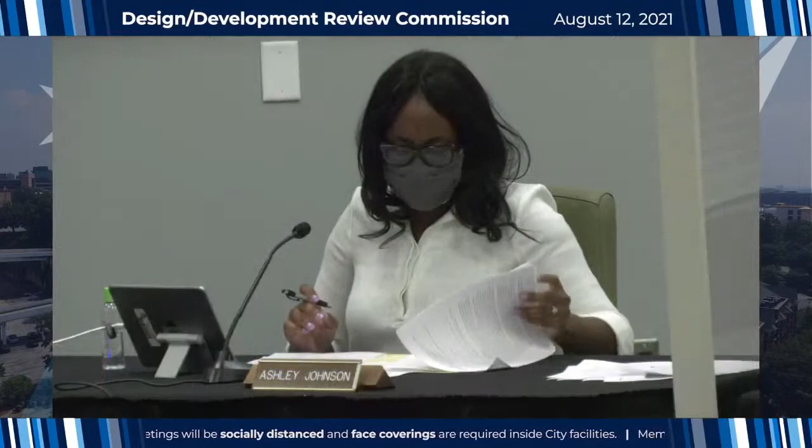Unless there's any follow-up comments, I'll open the floor to a motion. Okay, so I would like to do this a little differently than what was recommended. Commissioner Johnson, just try to get a little closer to the microphone. Can you all hear me? Thank you.

Okay, so I'm going to vote. I think there are certain aspects of this that should be granted and maybe other aspects that don't fit within the guidelines. In that spirit, I move to grant in part the certificate of design approval at 1808 Catawba Street, subject to the following conditions: the front door can be replaced, subject to the selection being reviewed by staff. However, I move to deny the request for the wholesale replacement of the windows and the surround around the door. This takes into consideration Section 7 of the design guidelines, the testimony provided, and the exhibits provided today.

I'm sorry, could y'all hear that last part? What was the last... I can hear the last. I was just saying that my motion takes into consideration the design guidelines outlined, as well as the testimony, comments, and exhibits provided today. Did staff clearly capture the essence there? Okay.

What about the windows? Give the summary again of the motion. Commissioner Johnson - I got it, but I'll let you do it. Okay, so I move to grant in part the certificate of design approval at 1808 Catawba Street, subject to the following conditions: the first condition being that the front door can be replaced with the selection to be reviewed by staff prior to purchase. However, I move to deny the request for the wholesale replacement of the windows and surround, based upon the design guidelines of Section 7. That would also include a denial of the surround and changing that out. Do we have a second? Second.